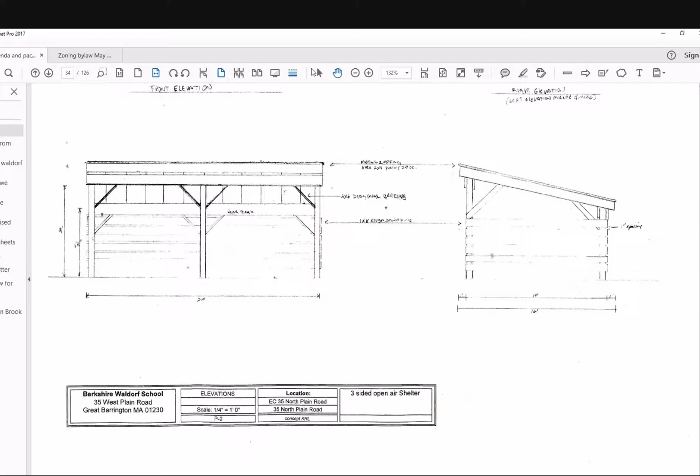Let me run through board members to see if anybody has questions. Jeremy, do you have any questions for the applicant? No. Malcolm, do you have any questions? No more. Pedro, any questions? I do not. Garfield, any questions? I do not.

My only other question is, are you having to clear any vegetation, any trees or anything to install these structures, or are they being placed in areas that are currently open? Currently open. These are all part of the playground, on the edges of the playgrounds already, space already in use by the kids, and we've picked spots that make sense for what they already do. It's a pretty simple operation, no trees coming down or anything like that.

Okay, great. Malcolm, do you happen to be on point 10? I have it, yes. Do you want to run through our site plan review criteria if there are no further questions from board members? Sure, thank you.

Number 1 is minimize the cut and fill, and the number of removed trees 6 inches caliper or larger, the length of removed stone walls, the area of wetland vegetation displaced, the extent of stormwater flow increase from the site, soil erosion, and threat of air and water pollution, which doesn't seem to be a factor.

No trees. Number 2 is maximize accessibility and pedestrian vehicular safety, both on the site and accessing and exiting the site. I don't think this is going to change pedestrian or vehicular circulation, just provide an extra covered space for those students. The kids are already on that side of the road, right? Yes, they're already using those playgrounds on both sides of that building on the north side.

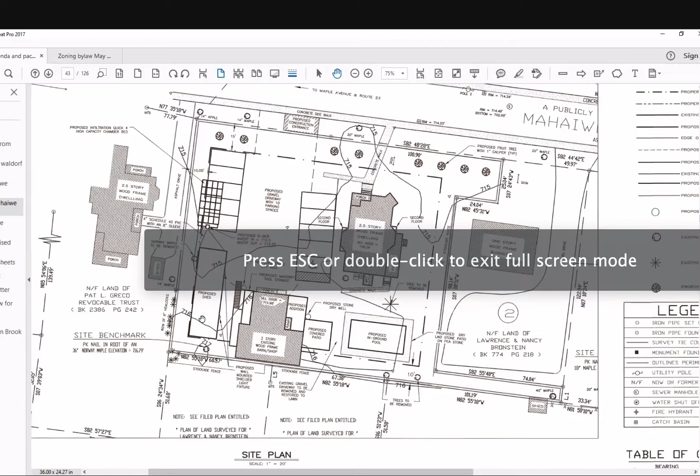Yes, okay, page 43 of the packet. That's the site plan. Can you see this? So Mr. Hazelton was just referencing, if you can see my cursor, this back half of the shed - this is the property line, and there's hemlocks there and a neighbor's shed there. So that's what Brian was just talking about.

I have a question. Is there anything - could that western side of the shed just be completely non-functional, just decorative to make it look like a residential building, meaning windows but not actual windows, and maybe window boxes but not actual window boxes, so that side could look like a residential building?

You don't think it has enough screening already to the neighbors? Well, no, but above - it's going to take a while for the hemlock to thicken, right? I think the row of hemlocks there is 8 to 20 feet, and they're already there, 8-inch calipers as it says in the plan, and there's a 14-inch maple tree. I think you're going to see through some of it. I don't know.

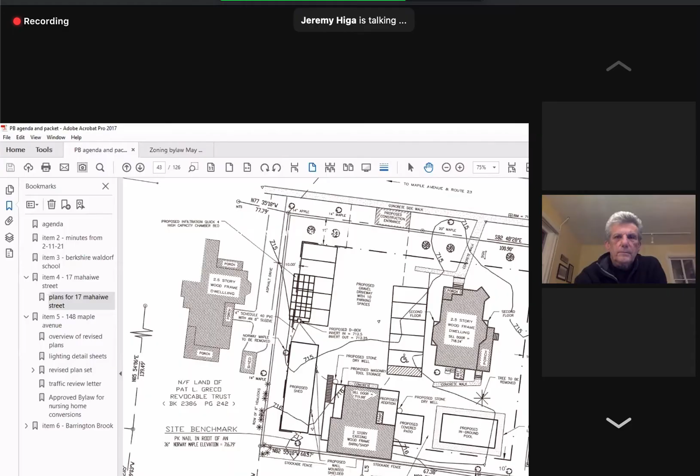I'll share the screen, Malcolm. The comment was referencing that in front of the houses, this is a greenway. Well, I think it's a little lower than that, if you line up more below. So these spaces are within this so-called greenway. Yeah, those two spaces.

You heard the applicant's comments about their parking needs and desire to keep so many cars. I was just wondering, so they had talked about two spaces being their openness, not their preference, but openness that two spaces be green pavers. I was assuming it wasn't probably those two spaces, but I don't know if the applicant could comment on which two spaces they were thinking of.

No, we were considering those two as the ones that we would consider possibly doing the grass pavers or grass pave. So does that mean those would be two of the spaces that would be used last? Correct, so that it would still have the durable substructure to be able to support a vehicle parking on it, but it wouldn't count — it would not represent a reduction in our off-street parking availability on the site, but it would help soften the impacts. It would give Mr. Hazelton the flexibility he needs to have the ability to park multiple vehicles potentially at one time, but try and address that comment as well.

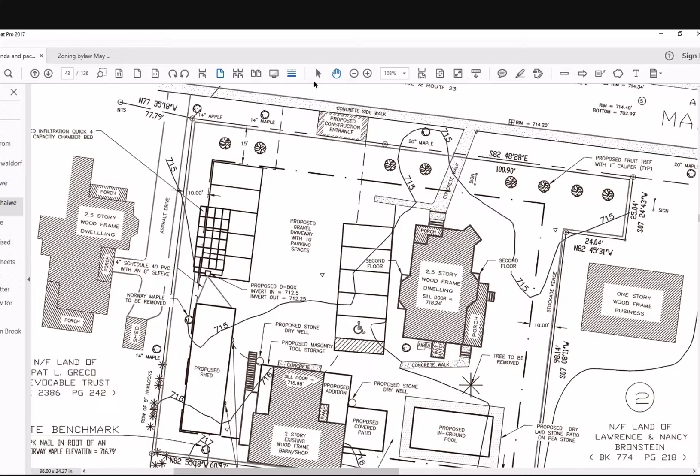But what you're saying is that there's not going to be cars parked in those spaces regularly for extended periods of time, that the main— I think that's a fair characterization of how those spaces will be used. Okay, so it's mainly going to be the 5 spaces adjacent to the house. Correct. Okay.

Anything else on number 6? Number 7: minimize contamination of groundwater from on-site wastewater disposal system or operations on the premises involving the use, storage, handling, or containment of hazardous substances. And I don't believe there's any proposal to handle any hazardous substances on site.

And number 8 is ensure compliance with the provisions of the zoning bylaw, including parking and landscaping. Any comments on that?

I wrote down 3 possible conditions. One would be no raw material stored in the setbacks. The second is the screening with a 4 to 6 foot fence on the west side of the parking there. And number 3 was the use of grass or grass pavers on the northern 2 spaces on the west side of the parking.

So I think that the grasscrete is not a good idea because, as Brian pointed out, every time you plow it, you're pulling them up. It's a mess. And these are just 2 spaces on a large parking lot, so it's not like it's going to make it seem fabulous or anything.

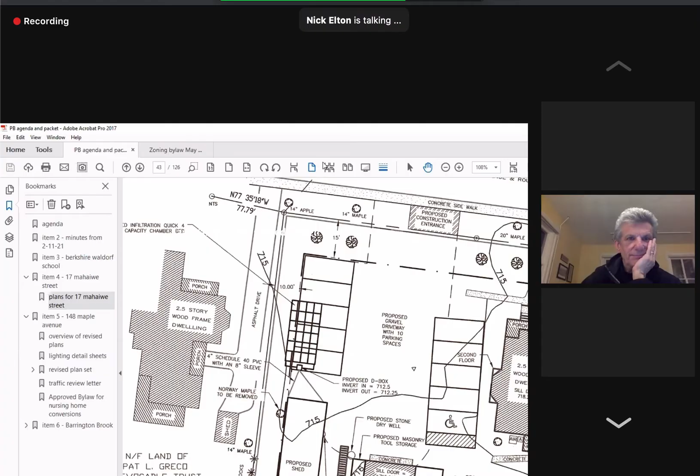As was stated earlier, the proposed new development is a proposal of 30 units. The numbers were slightly different from what Mr. Ferris indicated: there are 4 one-bedrooms, 15 two-bedroom flats, 9 two-bedroom duplexes, and 2 three-bedroom duplexes. The gross square footage of this is 38,922 square feet, as opposed to the previous proposal of approximately 44,300 square feet. The FAR, which was previously 0.237, is now 0.218.

Do you mind spelling out what FAR is for those not familiar? Floor area ratio is the area of all the levels of the building relative to the area of the site. There are currently 49 parking spaces on this site, and we will be proposing 50 parking spaces, of which 3 will be handicapped accessible.

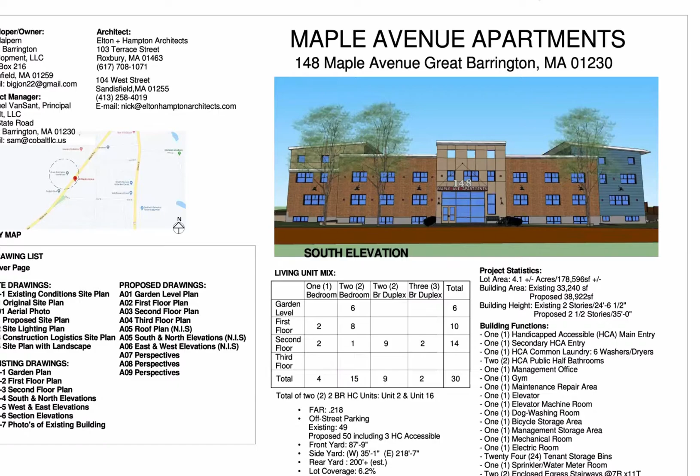Can I have the L1, the site plan, please? Okay, it seems to cut off a bit of Maple Ave, but can everybody see that adequately? This site plan is fundamentally unchanged except for a few things brought up during the last meeting. Some board members asked that we develop the courtyard on the north side of the building, which was always the intention. We have now done that with a permeable paving area surrounded by plantings on 3 sides.

There are some built-in tables in there, and there are 2 barbecues, in small 3-foot-high block enclosures with gas fed directly to them. I'll say, since I've done this quite often, the gas is such that you turn it on and it will only stay on for 30 minutes, then you have to turn it on again.

Much of the landscaping on this site plan is identical to what we showed in the last round. The significant change, as Mr. Ferris mentioned, is on the west side, where we're proposing to plant 11 arborvitae, 6 to 7 feet tall at planting. Arborvitae grow to between 40 and 60 feet unless pruned, so this should grow into a very complete shielding along the entire west side of the building.

We have also added 3 dogwood trees on the south side to correspond with the trees shown in the perspectives, which were an oversight in the landscape plan. They will grow somewhere between 20 to 40 feet depending on sunlight, actually growing slightly less in sun than in shade, so it's expected they might reach a maturity of about 30 feet.

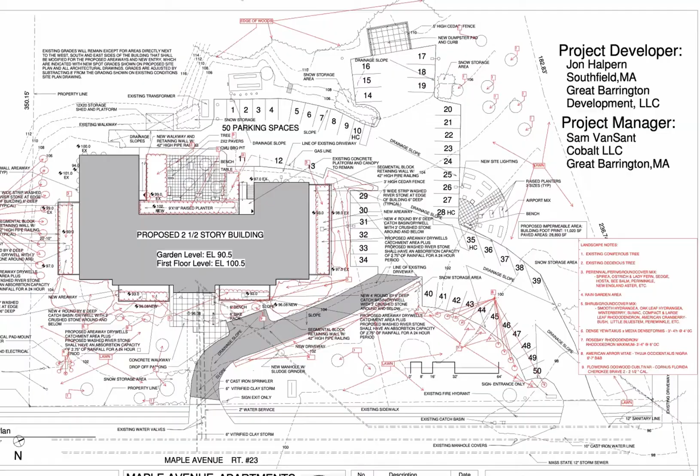We have not changed the site lighting drawing. I'm happy to review it again, but since I've shown it to you before, I don't think I'll bring it up right now. Can I have A01, please?

Previously, all the community spaces—a gym, a dog grooming station, laundry, bicycle storage, storage bins for residents, a public men's and women's half bathroom, and an office and maintenance area in the upper northern side—were all maintained from the previously proposed designs.

There was a mix of more 1-bedrooms on this floor before. We now propose 6 2-bedrooms on this floor, one of which is a handicapped accessible unit, unit 6. Again, as before, we have an entry into this building that's fully handicapped accessible on the south side, allowing access to the rear of the elevator. We'll be adding an extra elevator stop on the existing elevator, and there is a stairway half level up and half level down and an open space in the entry.

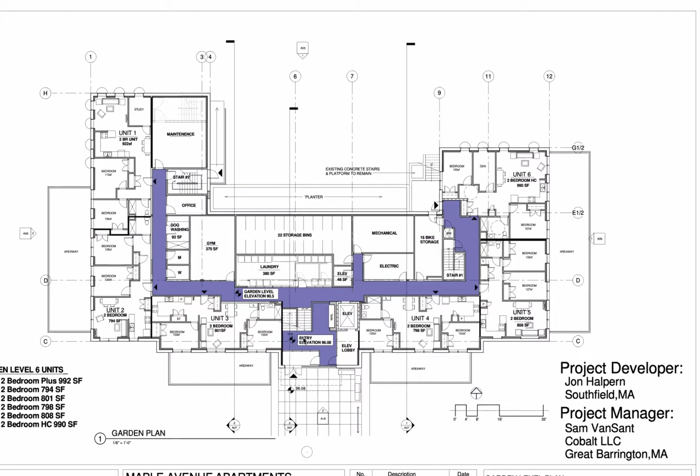May I have A2, please?

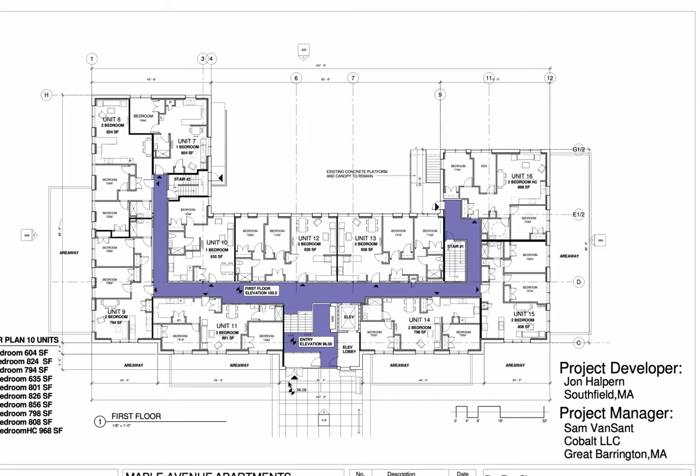This is what we call the first floor, but it is the second level of the building. It includes 8 2-bedrooms and 2 1-bedroom units. Again, the entry is the exact same as before, and we have the relative elevations shown on these drawings from the entries to the first floor. May I have A3, please?

This is the equivalent to the existing top floor of the building. The proposed changes now include 1 2-bedroom flat, 2 one-bedroom flats, 9 two-bedroom two-story units, and 2 two-story three-bedroom units.

For instance, the units in the upper northern portion, 17, 18, 29, and 30 along the north side, are all two-story units. Units 22, 24, and 25 in the middle of the north side are two-story units. Units 19 and 20 on the southwest corner are two-story units, and units 27 and 28 on the southeast corner are also two-story units. The rest are flats.

Can I have A4, please?

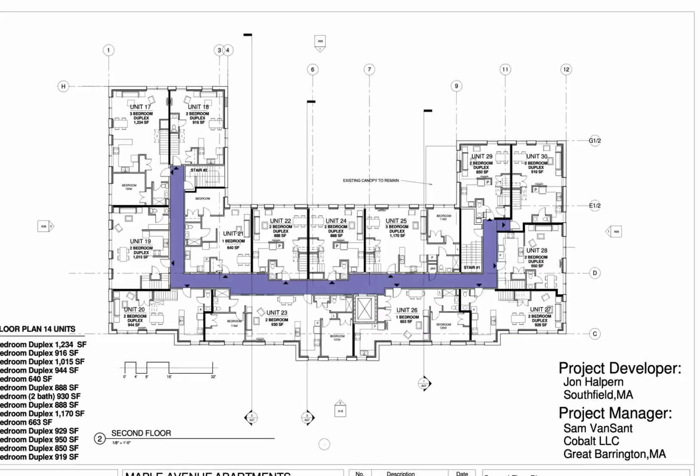So this is the upper level of all of those units that are two-story units. In every situation, they have 2 bedrooms and a full handicapped adaptable bath as required by code. Each unit also has, off of one of their bedrooms, a deck area on the roof.

We have tried to make it so that the decks don't look out directly onto Maple Ave or across the street. The deck area will be restricted by a railing around it so people on the decks will not easily be able to walk out onto the roofs.

As you may or may not know, the criteria are that this building needs to be a 2.5-story building. The definition in your zoning code of a 2.5-story building is that the area of the floor of the half-story must be less than half the area of the floor below, and must be housed under a sloped roof. We have presented a full calculation here.

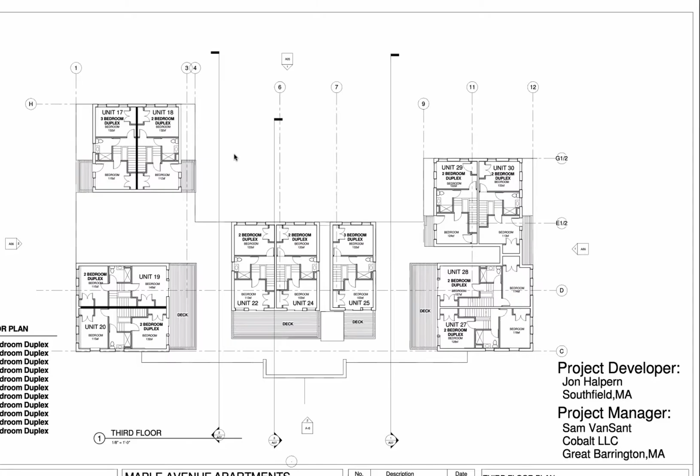May I have A7, please?

The photo in the upper right-hand corner represents the existing building, and these are some perspectives of what we are proposing. So the 2 additions proposed on the southeast and southwest corners are shown. But it's important to notice where the parapet is on the existing building.

If you draw that across, you can see that we are really adding only a very small amount above the existing. The roof is a little bit lower, so it would be about at the midline of where the windows are. The same thing holds true on the other side.

It will become, I hope, increasingly obvious when you see more of the perspectives. What we're trying to do is break up the existing volume of the building -- I don't want to make value judgments about the existing building, but that's what we're trying to do.

We're also trying to raise the parapet a little bit in the central portion of the building over the entry. It's just a raised parapet with openings through it, daylight openings. And we are still proposing the same canopy entry at the handicap level.

As you can see, the areaways are smaller than they were before, because previously they went totally across the south side, except in the areas where there was an entrance.

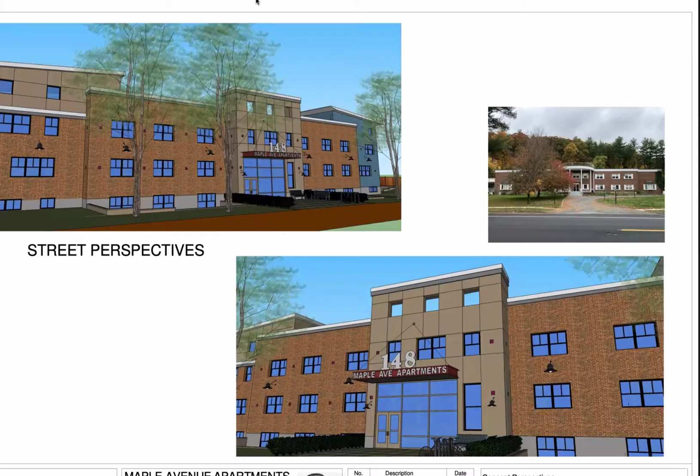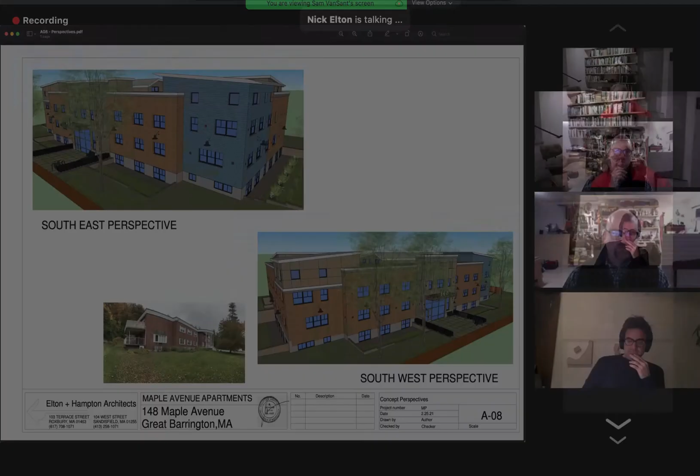These are other perspective views of the site. The photograph in the lower left-hand corner represents the southwest corner, as does the image directly next to it. The perspective up above is pretty much from the parking lot, or as you're approaching from downtown.

You can see that we are proposing to change some of the siding in that area, bringing it down over a portion of the brick -- again, just to break up the volumes a little bit.

Again, I want to point out that there are sloped roofs on these. These slopes are approximately 1.25 in 12. They are there to somewhat accommodate the headroom that's required, but also to meet the criteria that says the roofs should be sloped.

Can I have A09, please?

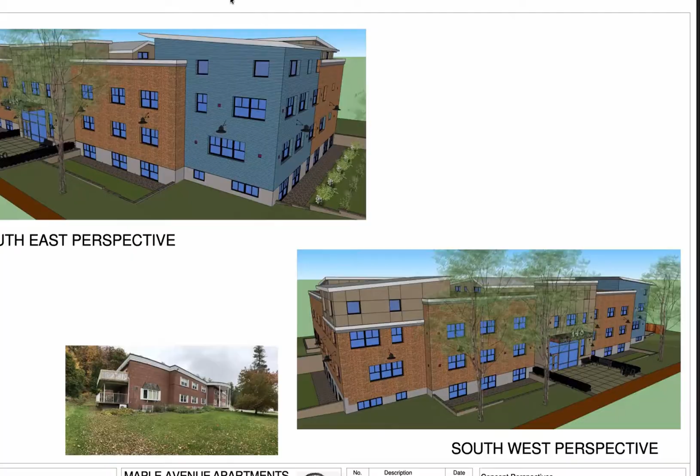These are some additional views. One view is from the northeast, which you can see in the similar photo. Again, that shows the additions more towards the rear of the building.

The two on the east and west are shed roofs. The one in the middle portion is a gable roof, and we've done that so as to minimize the visibility of that roof from the street. It's set back already about 20 to 25 feet on the building, but by bringing it down, we felt that would reduce its visibility even more.

I think the street elevation shows the entire street elevation, which you hadn't seen before. I think it demonstrates that although we're keeping most of the building as it was before, we're trying to give it an appearance that is a bit different. Of course, we're here to answer any questions that you might have.

Thank you. Nick, are you doing anything to the brick? Because the brick looks like it's a different color than what's in the building. Are you using that brick, or are you changing it, or what are you doing?

No, we're not proposing to change it. You know, it's very funny to try to replicate brick in SketchUp -- to get the color correct. It's not easy. We're not intending to change the brick. Then what's there?

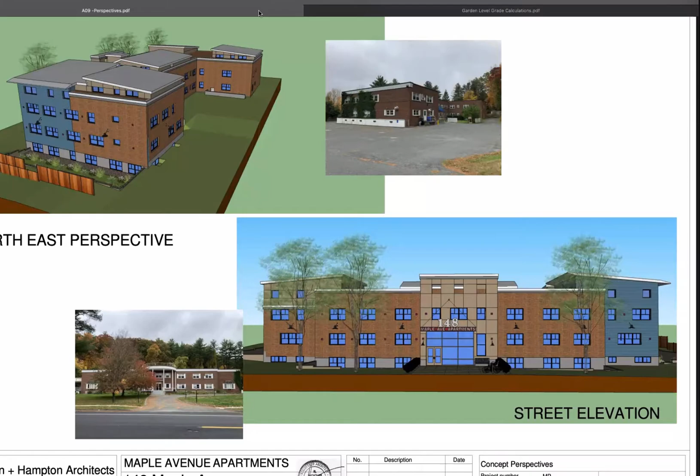All right, board members. So, Sam or Nick, was there anything else that you wanted to present to us as additional or revised information? Not really, no, I do not have any other information.

Okay, so I'd like to go by virtue of board members and see if there are any questions for the applicant. Jeremy, do you have anything at this point? Not at this point. Okay. Malcolm, anything for you?

You're muted, Malcolm, if you're trying to say something. Still muted. We like him best that way. Oh, no, he's permanently muted. All right, Malcolm, you work on that. We'll go to Jonathan.

The answer is no. I don't have any questions. I think it's a great improvement. I like everything they've done. Okay, Pedro, anything for you?

No, just let me make a comment. It looks like some of the drawings and information that we saw in the presentation is different than what we received. So that's always disappointing.